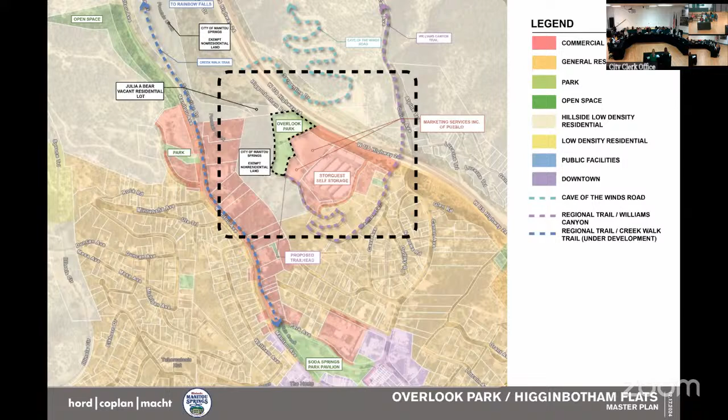Going to the next slide, it zooms in a little bit. There are two parcels on this site you'll see closer in a couple slides, but there's a right-of-way parcel for Topeka Avenue that actually divides the property and connects down into the neighborhood. We also have commercial development to the south, southeast. There's city property and open space to the west, which connects to another parcel that goes down to Serpentine Drive and Fountain Creek. So we were looking at all these different opportunities and how to access the site for different multimodal opportunities.

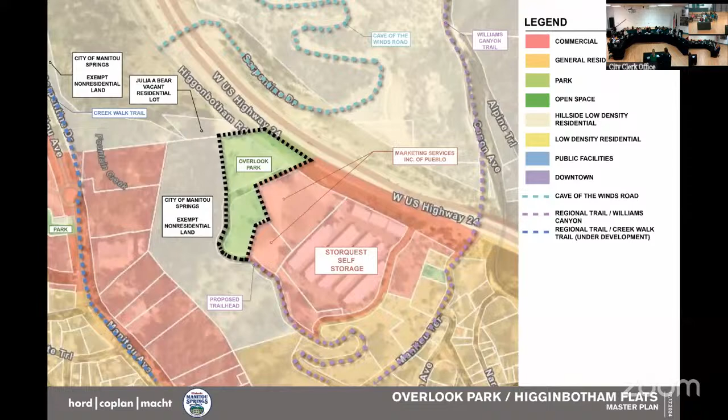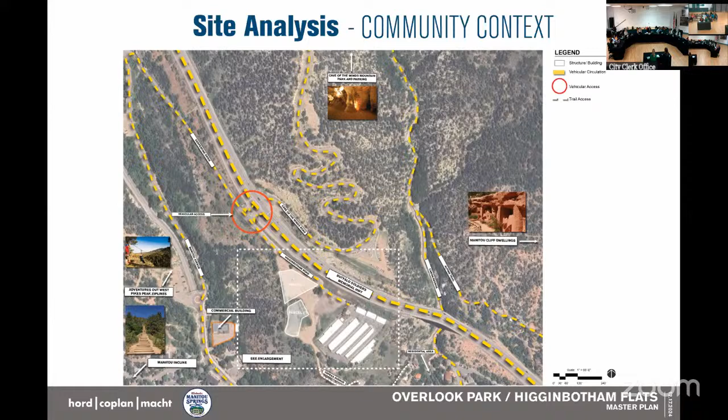Zooming back out again, this was just understanding what community amenities and features there are that might speak to the site, and again, that connectivity. So that's what this image shows.

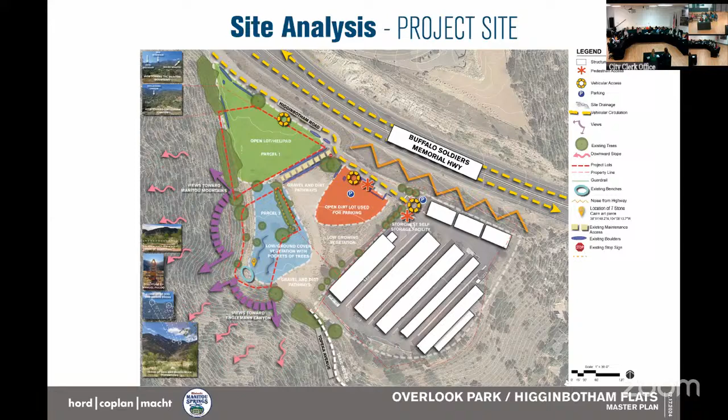The next one zooms back into the site. Here we looked at what is existing vegetation and what is not currently vegetated, how we can protect or utilize the topography, because it is pretty minimal. We know sound is something important to consider given it's close to the highway, and where the predominant views are from the site and how we can take advantage of that, as well as connectivity, whether it's there currently or potential for the future.

Initially kicking off the project, meeting with Parab as I mentioned, we developed three initial concept plans that we took to the community. We had a community workshop, held in this room, and followed that up with an online survey. From there, we again met with Parab, and you can see the dates on there for several meetings to refine the concepts, whittling them down to one preferred plan, and then ultimately the final master plan.

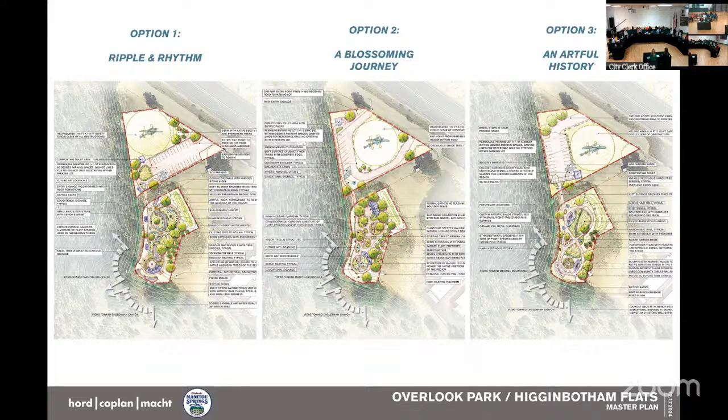These were three concept options that we brought to the workshop. We used them for a group activity where we had a group of people at each table and a questionnaire to help facilitate conversation about preferred concepts—what do you like, what do you not like, what do you feel is missing. At the end of the in-person workshop, we had everybody report out so we could understand that, because it's really important to hear what the conversation was.

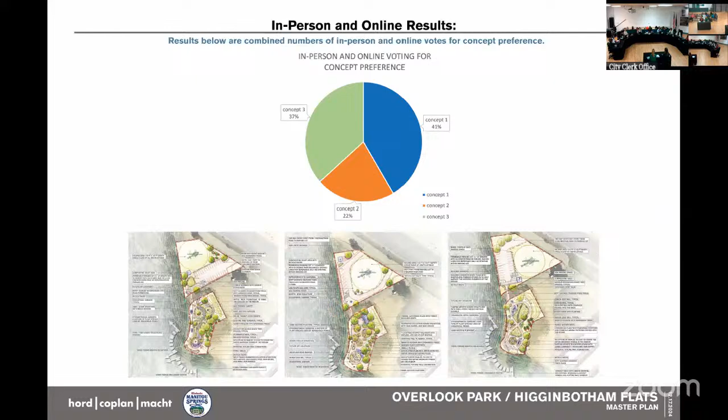An online survey was released the following day and was open for two weeks for feedback on those same activities, just in a digital format. After that, we combined all the results from the in-person and online feedback, which helped us digest that information and funnel down to the direction we should move for the preferred plan.

We went back through the process asking whether we were providing these top amenities desired by the community. We reviewed all these results with the Parab group before refining the concepts down to one alternative, with great dialogue about other things to consider, like maintenance, operations, and accessibility.

So with that, I'm going to turn it over to Mia, and she's going to jump into the fun part, the meat of it, of the master plan, starting with the master plan core elements that feed into those goals you saw earlier. She'll explain those in more depth, because these are really important elements in the master plan.

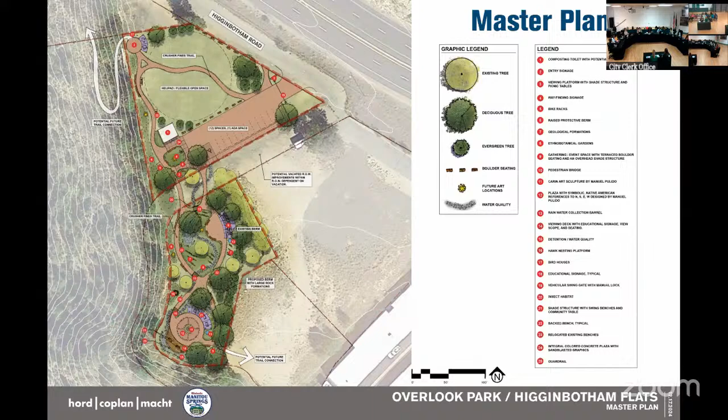And so through all of that process, we came to this master plan. I'll go into detail for the different spaces, but this slide encompasses a lot of the big main elements. In the next slide, I'll jump right into the north side and we'll work our way south.

As a visitor to this space, you have a couple of means of accessing it. The main access point would be along Higginbotham Road. As you're approaching the site, you enter a very minimal parking lot. We had comments from the community wanting this space to be fairly small, not too much parking, really driving people to access it by foot or bicycle, with a limited amount of parking.

As you're entering the site, there's a monument sign and a vehicular swing gate that would be manually locked by the Parks Department at night to limit people staying around past hours. Once you enter the site, it's meant to be an exploratory space where you can meander and explore through natural materials, like crusher fine trails.

The entry plaza welcomes you with educational signage. It has native planting, and the ethnobotanical gardens are present right as you walk into the first entry plaza. There's a composting toilet right at the entry as well, so people can use the restroom before they explore the space.

To the north side, there's an open, flexible space meant for people to use for picnics and running around, but it's also meant to be a space for the fire department to use for emergency helicopter landings if needed.

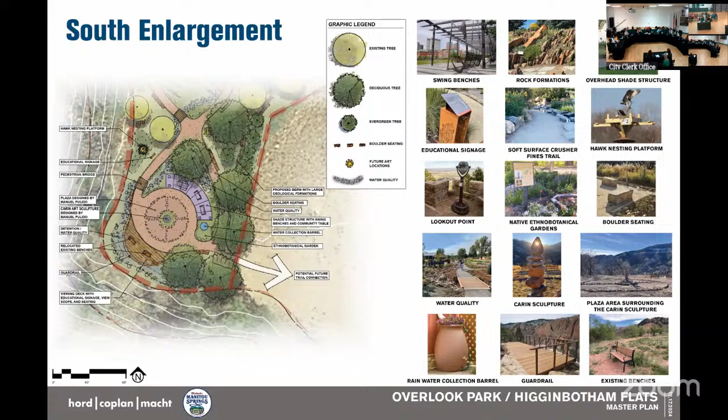Other councilors? Julie: Where's the locked gate? I missed that. Sure, if you go back a couple slides to the north enlargement, right at the entry of the parking lot there's a line that goes across, and that's meant to be - there we go. It's marked 19 on the slide. There you go. Yep, oh thank you.

And my other question is, there's a really nice photo with flowering plants in the PowerPoint, and you said there's not a lot of water available on this site. Can you elaborate on that for us? Sure. Well, I guess what I want to know is, what does that mean, and how does that affect your plans to keep these plants alive?

So we did find out during this process there has been a broken water system up there that I believe is going to be repaired if it's not already. So water will be available for the site. So we do anticipate that we would use water to establish the plants, but the goal is to obviously minimize water use as much as possible - so plant selection as such - but we would be able to irrigate it.

And there are 13 parking spots - is that planned? Do I get that right? 12 plus 1 ADA? That's correct.

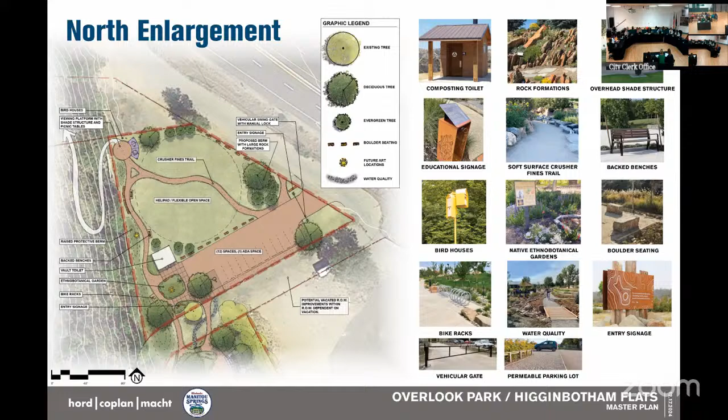And you said something in the south enlargement page about opportunity for education to learn about plants and water. Can you elaborate?

So the native plants on the site are a mixture of the ethnobotanical garden concept. Some of the plants will be indigenous based, and some are just regular native plant selections from a palette of plants in the area. The educational portion would come into the differences between them, teaching about certain special species on the site that are unique in a way, having indigenous qualities or medicinal qualities or things like that.

The water concept would be learning about how the water flows throughout the site and how it contributes to the native ecosystem. How's that education going to be provided?

Are you going to have a bunch of plaques, or are you going to hire somebody? What's the idea? That's still in the works a little bit. As of right now, it would be a mixture on the plans as plaques as well as identification signs for individual plants. But the intricacies of what that looks like would get figured out later down the line. There's a lot of beautiful ways of having interactive signage as well as just plaques and text, things like that.

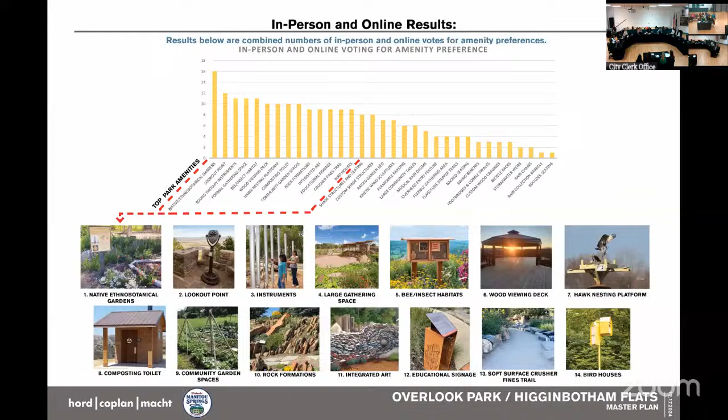Vandalism, that's been mentioned. I think that is a relevant concern. And who's going to use it? Will Manitou residents use it? Will tourists? Are we just creating an attractive spot for people? With an RV, you could pull over and want to stay there all night. I don't think that's one of the attractive nuisances we want to create.

Water is scarce, a lot of wind and water, so whatever vegetation up there has to be hardened. Vandalism is a concern. I think that Topeka Avenue needs to be addressed. That's an escape route for the neighborhood below, and also an access for emergency vehicles.

I think part of the deadline, this being the last meeting of the year, we were trying to get this done in part so that Manny could get some direction if he was going to get his grant from Match. But my understanding was him being able to get that was contingent upon us approving this. And like some of the other council members, I'm surprised that he went ahead and did the work. I guess I'd like to hear an explanation of why that's the case.

It's beautiful. I like it. And certainly the area has resonated with a lot of the Native Americans. You can see that they went in and voluntarily built their own medicine circle up there right after Indigenous Peoples Day. So those are some of my thoughts.

I am inclined to not support this at the time. I do want to recognize the work that people have done. There's some neat ideas here. I don't think this is the time. I think we need to address some other things and get those done. As I think Councilor Wolf said, if we go ahead with construction drawings now, are we going to have to change them in a couple of years? It's just kind of maybe money down the drain.